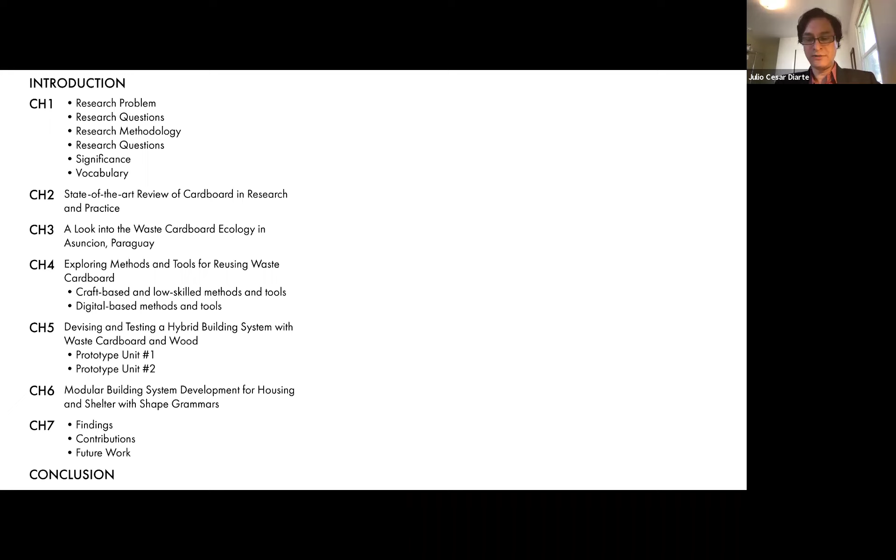This is the dissertation's structure, and this presentation's goal is to walk you through each one of the chapters and share with you the findings and contributions.

Let's start with the research problem. This dissertation explores how to take advantage of the rapid growth of urban solid waste and the potential of waste cardboard as a resource to support low-cost housing solutions in low and middle income countries. Waste cardboard is among the least valued recyclable products, and it is highly underused in these countries. The work aims to contribute solutions to tackle the lack of decent housing in these countries where recycling and reusing rates are still low.

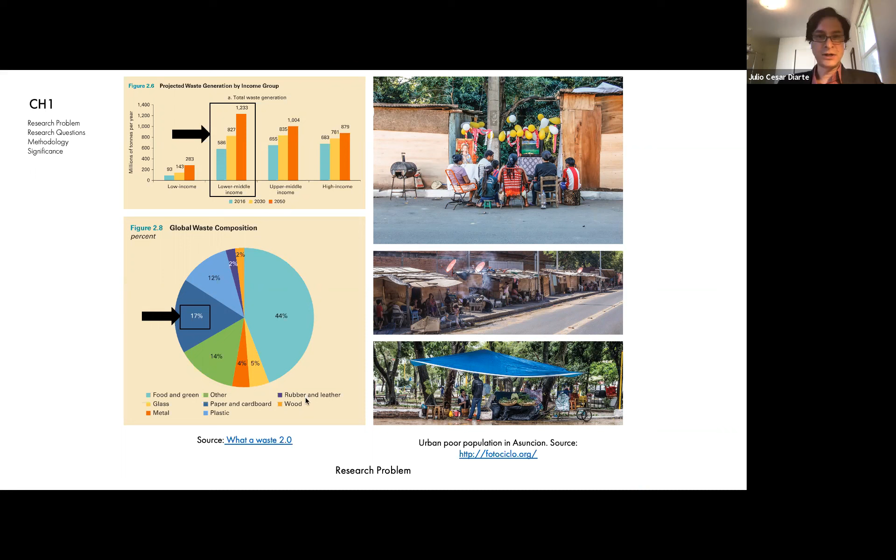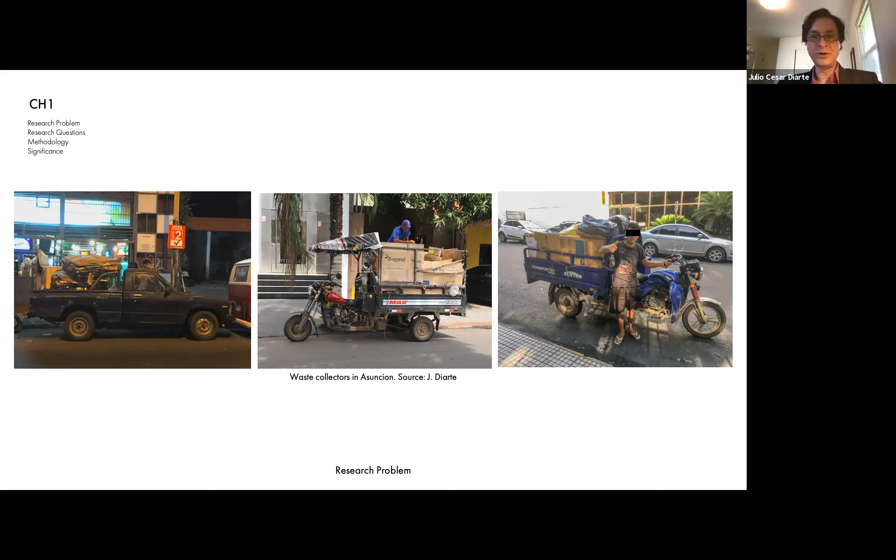In this dissertation, I will show that waste corrugated cardboard has the potential as a building material to produce low-cost building parts for housing. I will also show that the system could help self-employed waste collectors upcycle and potentially increment their revenue. Waste collectors have free access to this material but do not have the means to upcycle it.

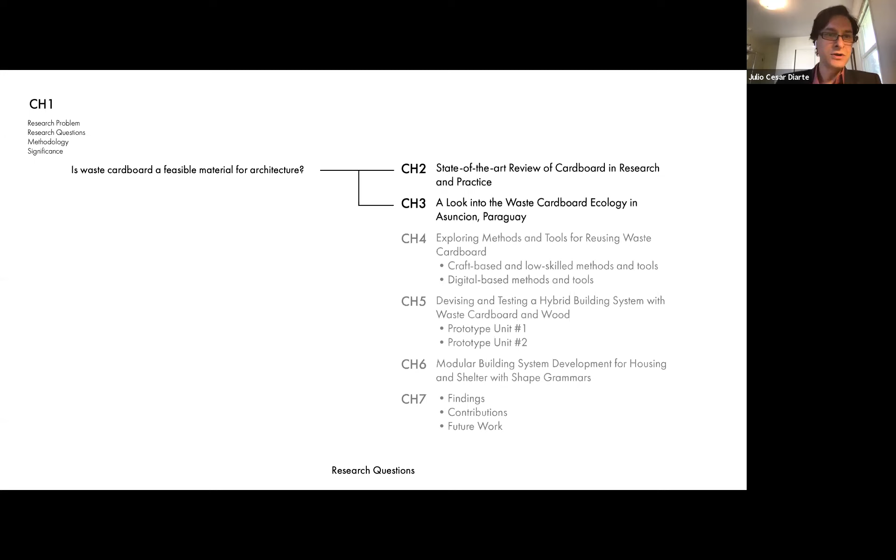Let's start with chapter one. First, I want to mention the research questions that guide this dissertation. Is waste cardboard a feasible material for architecture? This is addressed in chapters 2 and 3. How to make low-cost building components for housing construction with waste cardboard is addressed in chapters 3 and 4.

How to enhance cardboard material properties and decrease its vulnerabilities, and what methods, tools, and technologies are needed to produce the building components with this material, and how to introduce this to waste collector communities is addressed in chapters 4 and 5. Finally, how to formalize the proposed methods to create a building system with waste cardboard as a main component is addressed in chapters 5 and 6.

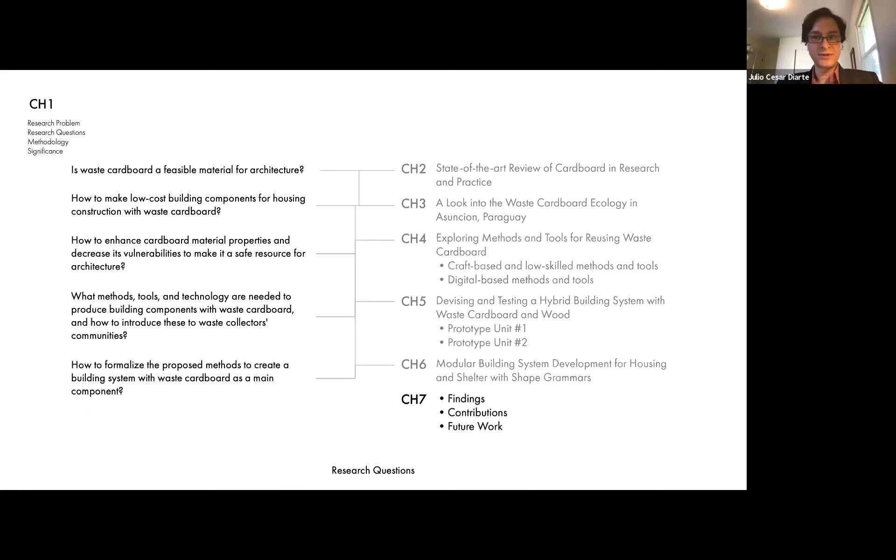Chapter 7 will revisit all these questions and discuss findings, contributions, and future work.

The dissertation used different research methods for each chapter. Chapter 2 was exploratory work developing reviews and preliminary material explorations. Chapter 3 used design ethnography and case study to implement field observations and key informant interviews. Chapters 4 and 5 are more experimental work, prototyping and developing building components, even at full scale. Chapter 6 is exploratory work where I design a building system for housing using the work I did before, in this case using shape grammars.

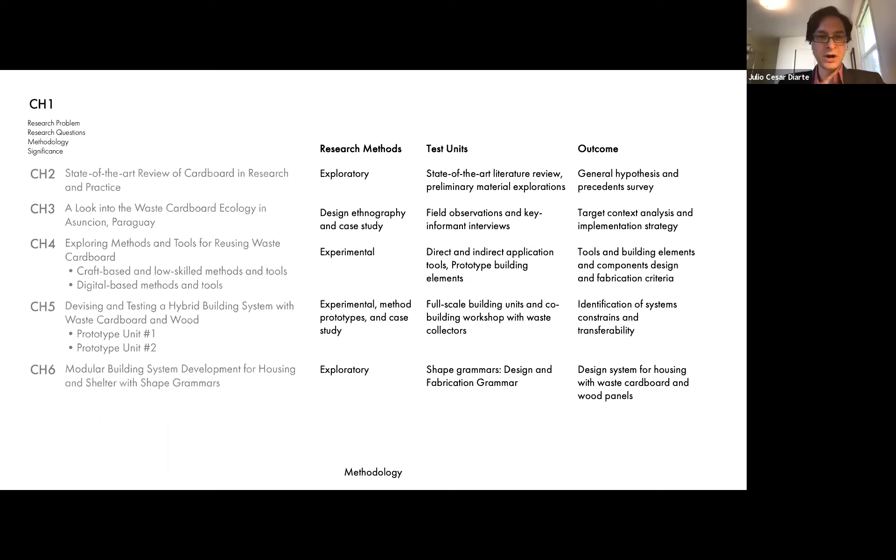The significance of the research touches 4 different points. The first is diverting waste cardboard from the urban waste stream to a resource for construction. This has environmental significance, especially in low and middle income countries where most waste cardboard ends up in landfills or open dumps, and where people need alternative solutions for housing. Second, it introduces waste cardboard as a resource for architecture.

This is important because most of the cardboard used today in architecture is brand new cardboard, and there is very little research done regarding direct reuse of material collected from the streets.

The dissertation supports the work of waste collectors in low and middle income countries because, as I mentioned before, they need housing and have almost free access to the material, but do not have the means to reuse it. The dissertation provides them with tools to bridge this gap.

The dissertation also bridges university and community. Here, the university serves as a resource to support collectors' work and organize co-building workshops to train them to use the system proposed here.

Let's move now to chapter number 2, which is the review about cardboard in research and practice. This graphic shows the chronology of cardboard in research and practice during the last 8 decades.

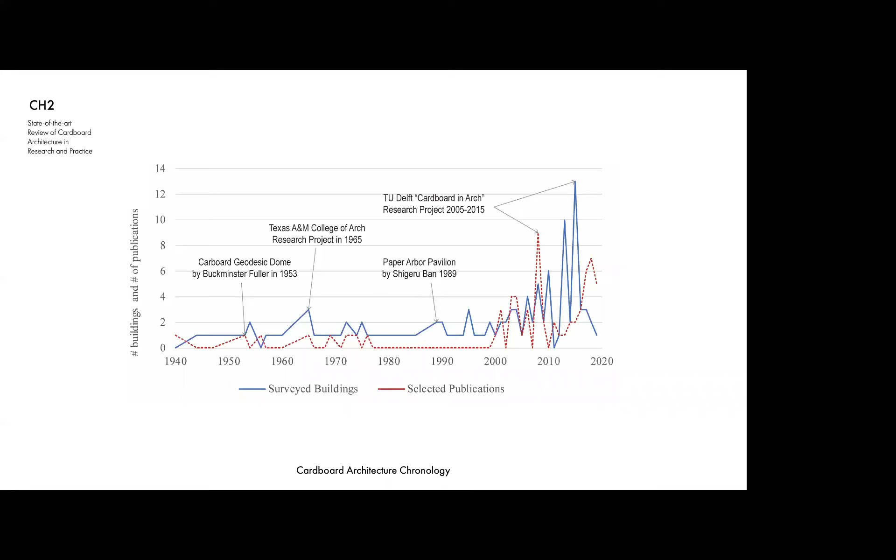The emergence of Shigeru Ban's buildings in the 1990s motivated the establishment of research centers in different universities. The main goal of these centers was to find new applications of brand new paper cardboard in architecture and structural engineering. The sustainability factor of paper products is still one of the main drivers of interest in this material.

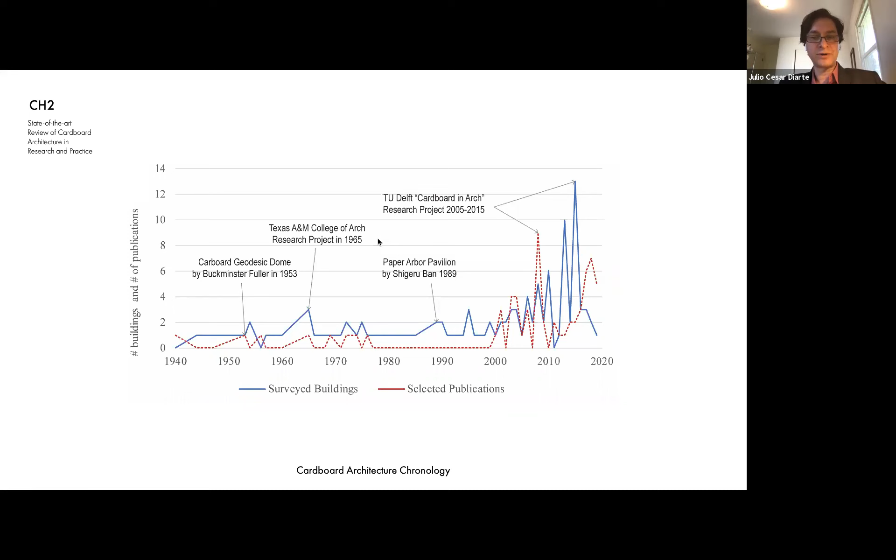Cardboard architecture chronology has two phases. The first was from 1940 to 1976, where the interest focused on structural performance, durability, thermal and moisture resistance of different composite walls.

However, concerns over durability of cardboard structures under long-term loads and natural elements led to the adoption of other materials such as aluminum, plywood, and plastics combined with foam.

The same advantages and concerns were maintained in the second phase from 2000 onwards, but interest in the sustainability of paper prevailed, and closer collaboration between designers and engineers opened the path to significant advancements.

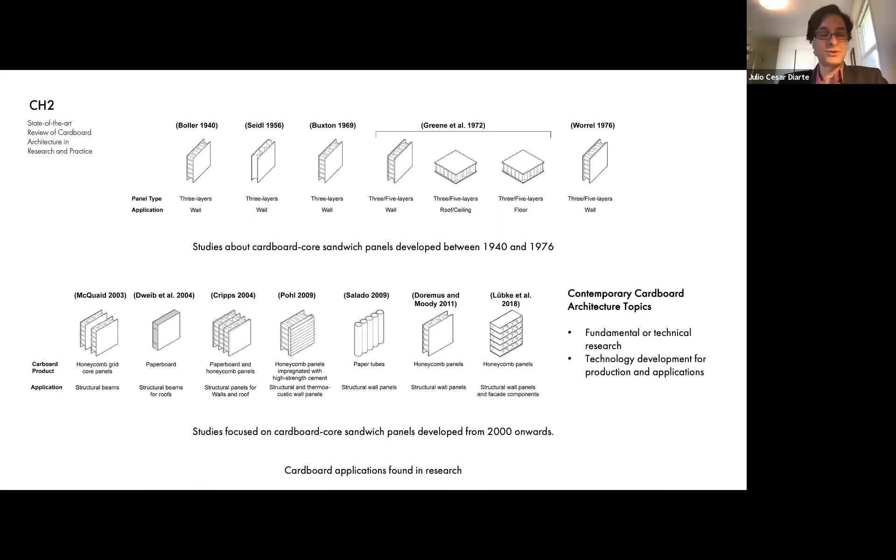Contemporary cardboard architecture topics center on fundamental or technical research, trying to improve the material properties of cardboard against moisture, and technology development for production of building components and their applications in architecture, always regarding brand new cardboard.

The review allowed me to identify two types of structural systems in cardboard architecture: active vector and active surface structures. Most of Shigeru Ban's works fall into the category of vector structures, using paper tubes as the main material. However, flat surface structures made with corrugated cardboard or honeycomb boards are much more common.

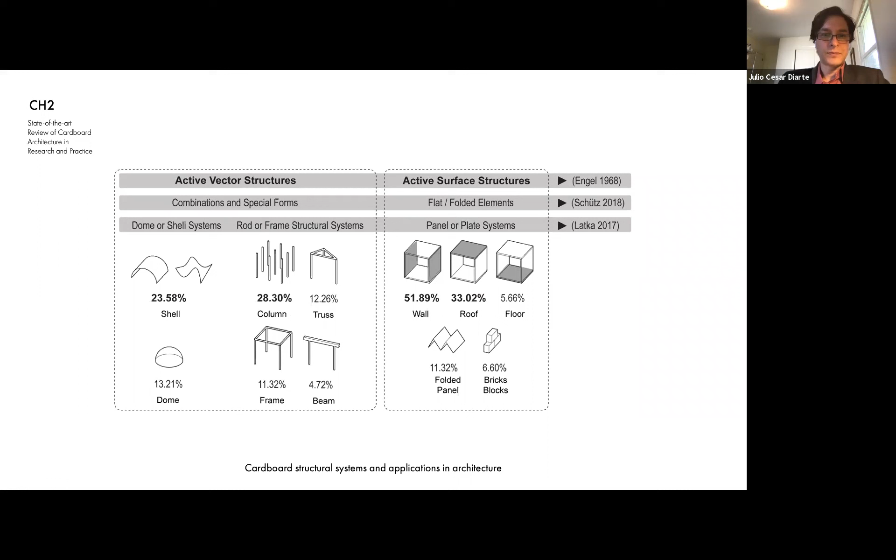These are some of the main strategies applied to both increase load-bearing strength and decrease moisture absorption. I highlighted those that I believe are applicable in low-cost contexts, which include joints, application of joint systems, reinforcement, and stiffeners made of wood or steel, depending on the budget.

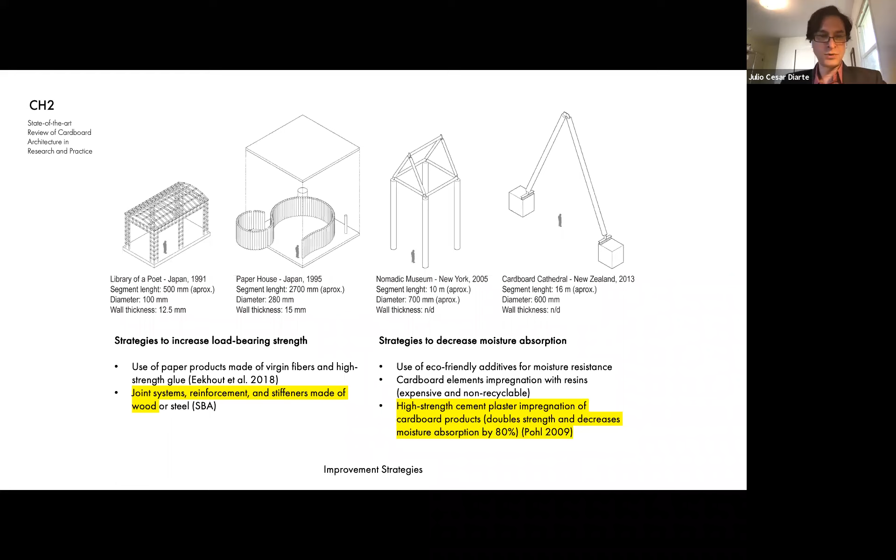To decrease moisture absorption, the most effective method is the application of high strength cement plaster to cardboard products. This is proven to double the strength and decrease moisture absorption by 80%, according to research groups at ETH and other universities in Europe and North America.

To close this chapter, I want to mention that we submitted a paper about cardboard architecture, eight decades of exploration in academic research and professional practice, to the Journal of Architecture, and this is currently under review.

Moving now to chapter 3, here I will talk about the field study that I did in Asunción, Paraguay. I developed an exploratory study to understand the waste cardboard collection process in a real context situation. In this work, I pay attention to the work of waste collectors, who are the potential implementers of the cardboard building system. I chose Asunción as an example of a growing urban area with very low recycling rates.

This is compared to other countries in the region and worldwide, and because there is an increasing number of waste collectors in the area. Also, most of the recyclable materials that are collected are exported and are not really being taken advantage of in the country.

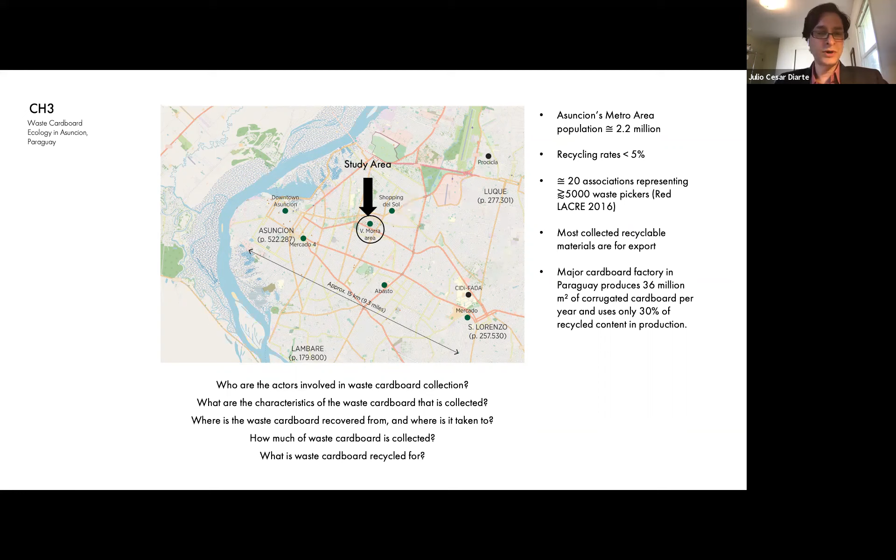I carried out field observations in the commercial area of Villa Morra here in the center, and interviewed different people involved in the cycle of waste cardboard in the metro area. These are some of the questions that guided my work in Asunción in December 2018, and August and December 2019.

Even though people collecting urban waste are commonly portrayed as the poorest of the poor and their work as marginal, the truth is these communities play a significant role in the industry's supply chain of raw materials. Since 2000, waste pickers in Latin America transitioned from scavengers to self-employed environmental entrepreneurs and have achieved a remarkable level of organization through cooperatives and associations.

Waste collectors in Asunción aren't recognized as formal workers yet. They come from poor areas of the city, equipped with three-wheelers or on foot pulling a cart. They recover aluminum, glass, paper, and cardboard. Waste cardboard, they say, must be dry and uncontaminated with food.

Otherwise, they cannot sell it to the final recyclers. They are conscious of the value of what they do and the material they recover, but do not have the means, financial or technical, to learn how to upcycle materials to increase revenue or use them as a resource for building or improving their houses.

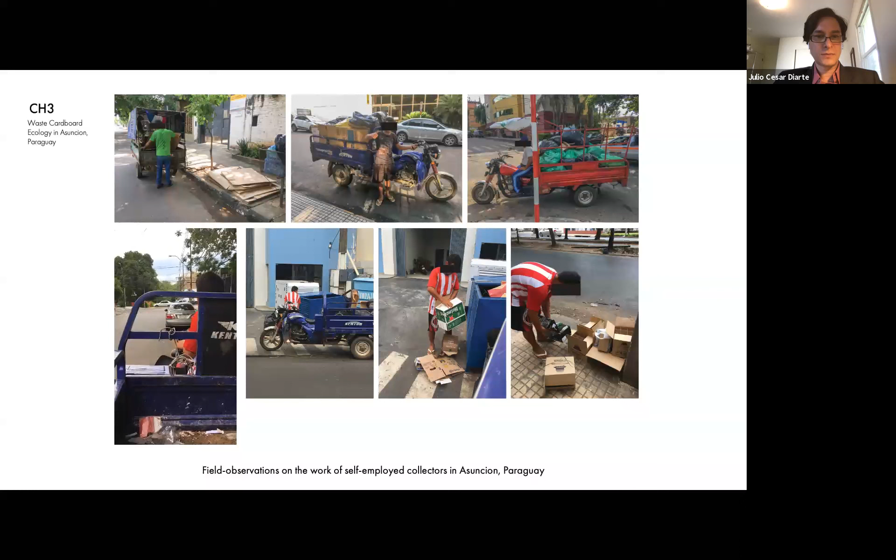Other actors playing a relevant role in the cycle of waste cardboard are NGOs and startups, and local paper industries. NGOs and startups focus on collection, sale, and waste management training for private companies. Both make a gigantic effort to help informal waste collectors improve their working conditions. However, none of them have the capacity to upcycle what they collect. Regarding paper factories, it is unclear how much waste cardboard they recycle.

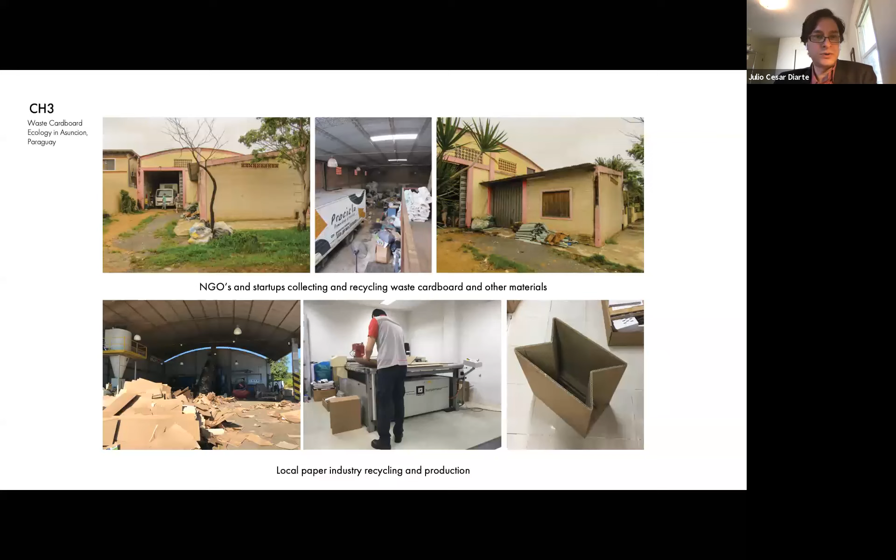The largest paper company in Paraguay, for example, uses only 30% recycled cardboard in the total production of brand new cardboard. According to them, waste cardboard can be recycled up to five times and it only serves to make more cardboard, making it the least valued product. Paper factories, on the other hand, are equipped with high-tech tools that could easily transform brand new cardboard products into construction components.

The intervention strategy seeks to take advantage of the low price of waste cardboard, its high degree of availability, and the low production level of brand new cardboard that uses recycled material. In this scenario, cardboard factories, NGOs, startups, and waste collectors can contribute to create a new value chain for the material. The research proposes to equip waste collectors in recycling and reusing centers with technology developed at the university to produce building components for housing.

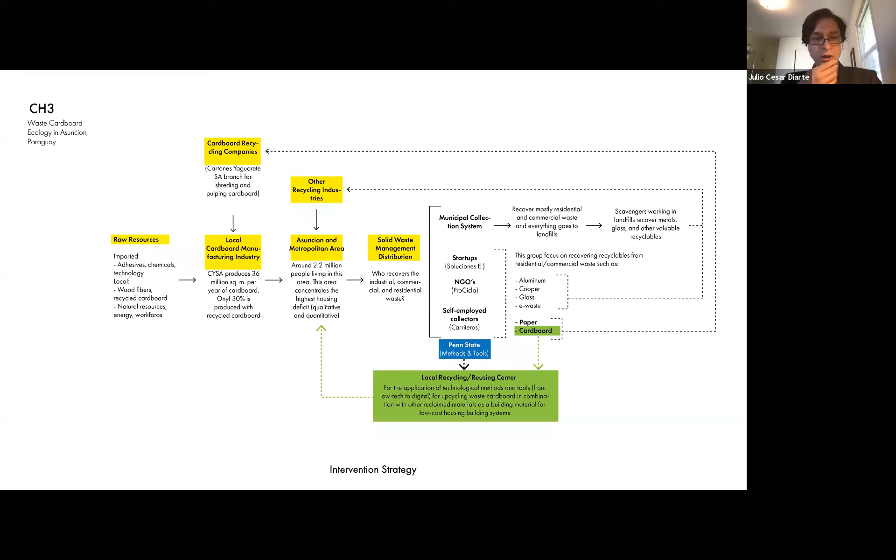Within this framework, the research proposes a case study described in chapter 5. In this study, I worked with several stakeholders, including waste collectors, NGOs, a startup, and the university, for organizing a co-building workshop.

Moving now to chapter 4, which is about methods and tools. Chapter 4 is divided into two parts. The first part presents craft-based and low-skill methods and tools intended for direct use by waste collectors. The other part is about digital-based methods and tools to design and generate fabrication instructions for building components.

The idea behind this is to find simple and safe ways of reusing waste cardboard and figure out what methods can help design and fabricate these components. The research focuses on prototypes and making as the main drivers of the investigation process.

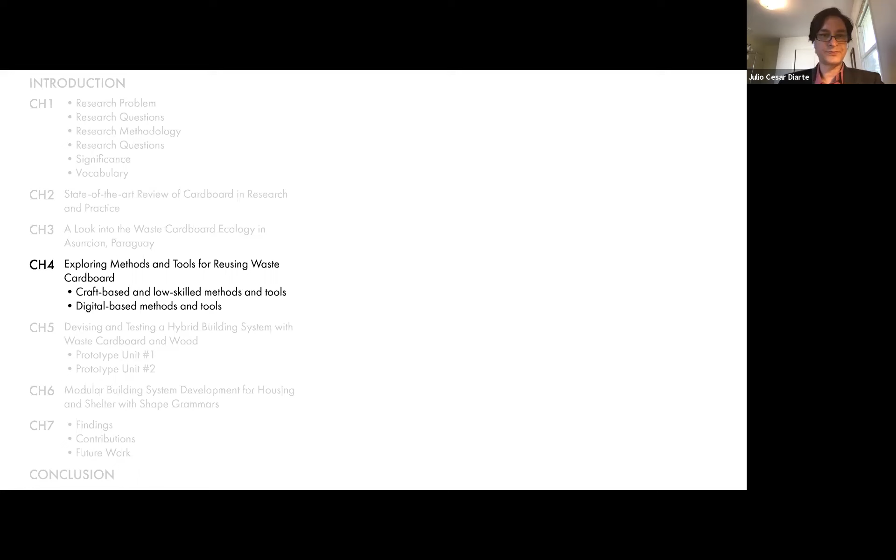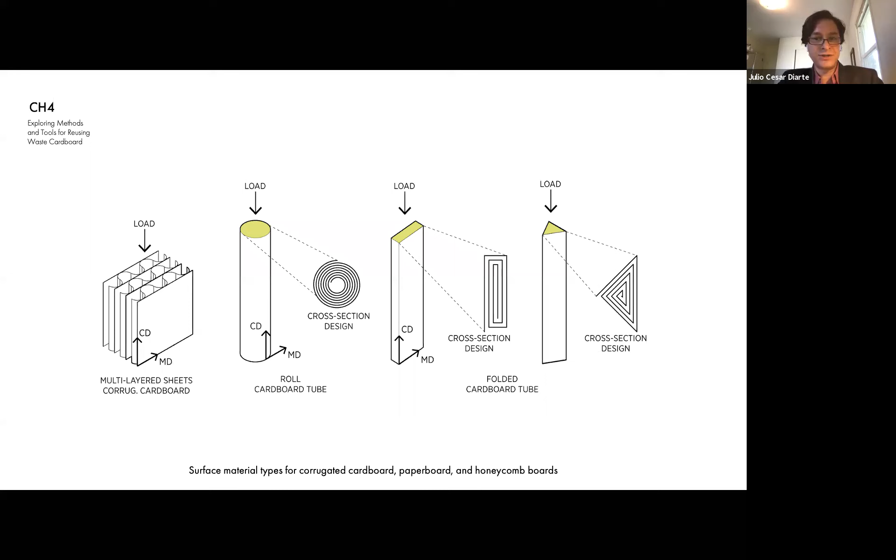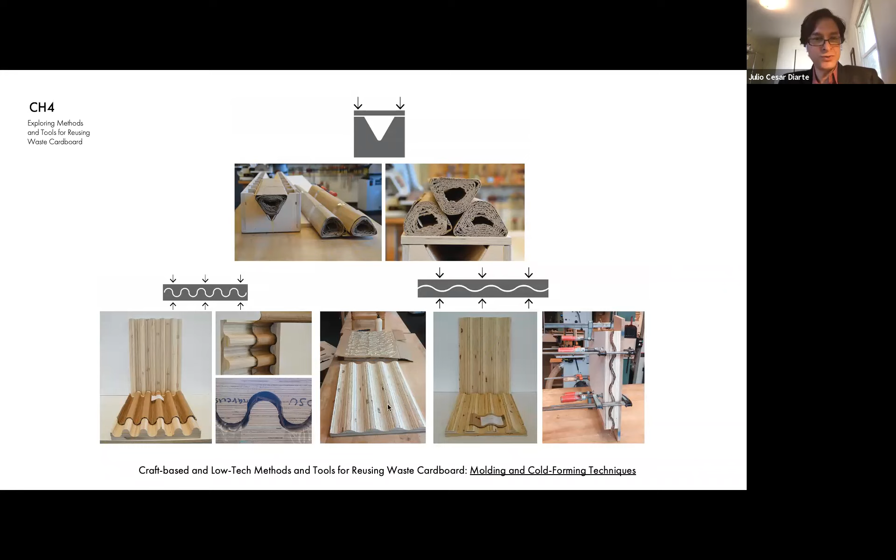These are some examples of making techniques using molds made of wood to form logs and boards. The idea was to develop tools that are easy to make, easy to use, and easy to maintain in the target context.

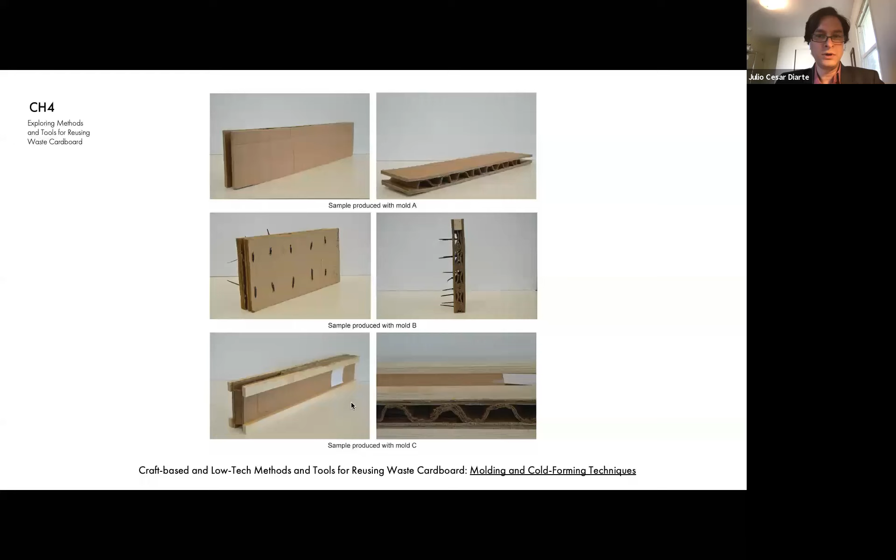These are some of the prototype building parts made with those tools, which can be used to make panels, or formwork for casting concrete panels or concrete beams.

Also, in the realm of craft-based and low-tech methods and tools, there is the parallel winding technique, a tool inspired by the fabrication process of standard paper tubes used for decades in the packaging and construction industries. The process facilitates making logs or posts of variable diameter and length that could resist a load by itself or in combination with other materials.

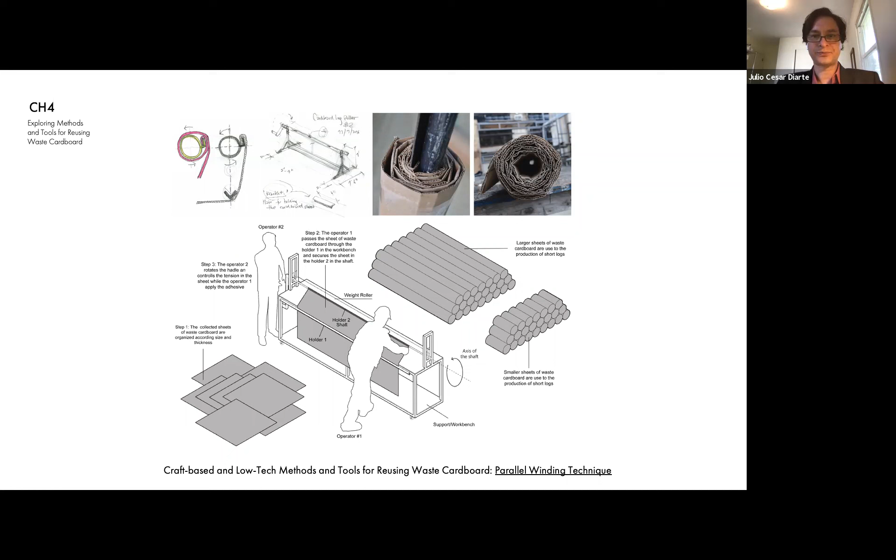The slide shows the testing process of the tool. This was completely developed at the Stuckeman shop.

Some of the benefits of these tools include that they are easy to make in the target context. They are user friendly, low maintenance. They are very good for producing a small size of cardboard sheets. They can be automated easily, and they are light and transportable.

On the other hand, they need to be fabricated by professionals. They are relatively low cost depending on the materials used. It is not that good yet for making large building parts and requires lots of physical effort. And still, the quality of the outcome is very rough and needs further development.

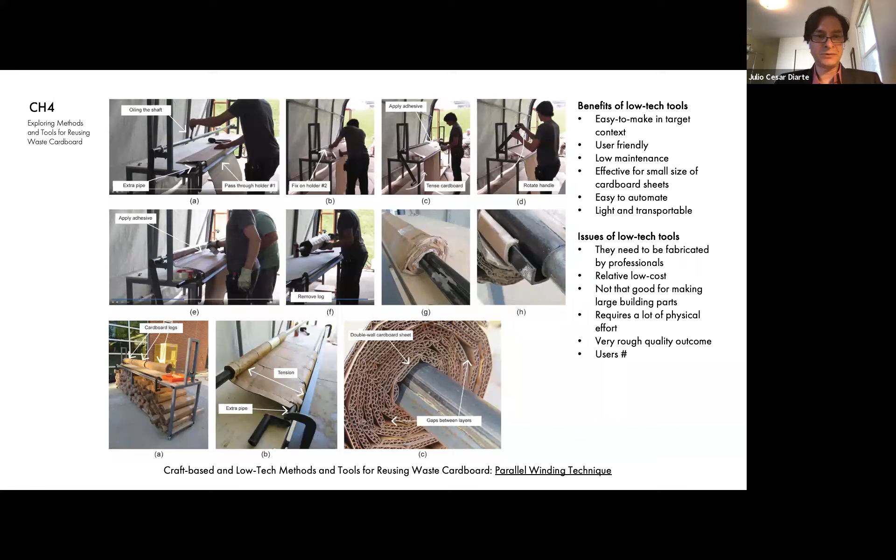Unlike low-tech tools, these digital-based tools are not intended for direct use by waste collectors yet. Instead, these tools provide instructions for waste collectors to make the building components.

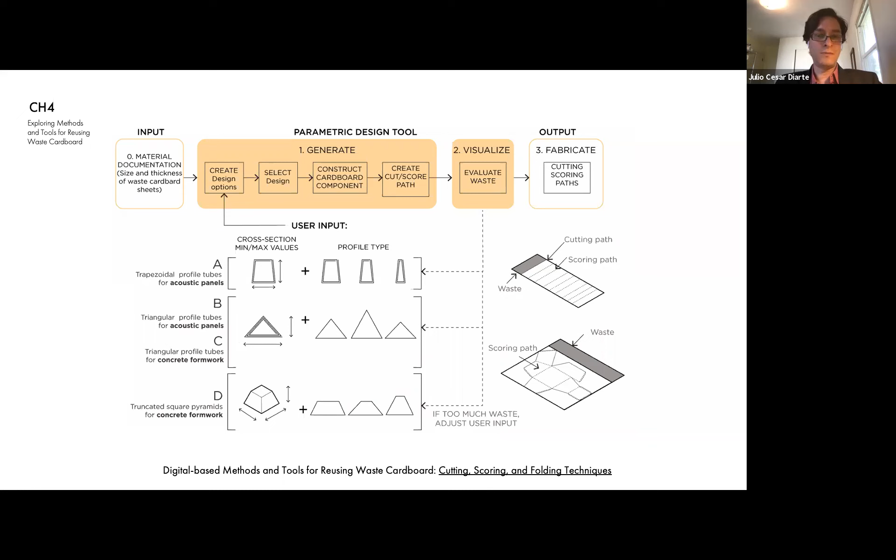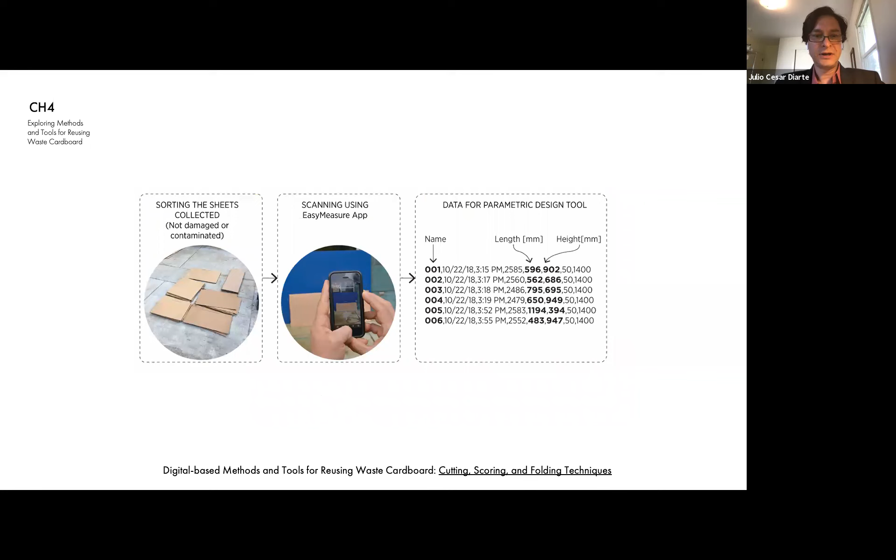The workflow starts with recording the size and thickness of the sheets using existing smartphone applications widely available in the target context. Then the digital tool receives the material documentation data—size, thickness—and compares it with the user's design. On the top left, we can see the different options configured by the designer.

These are the selected options that match the existing material. Finally, the tool provides printed instructions for cutting, scoring, and folding sheets of waste cardboard, everything done by hand. Some of the benefits of these digital tools include...

increased material reuse, adapting any kind of sheet to almost any kind of building component shape, providing fabrication instructions for manual production, and being adaptable to other types of flat and foldable materials.

The main issue with this tool is that it requires high skills for implementation. Therefore, it is not intended for direct use by waste collectors yet.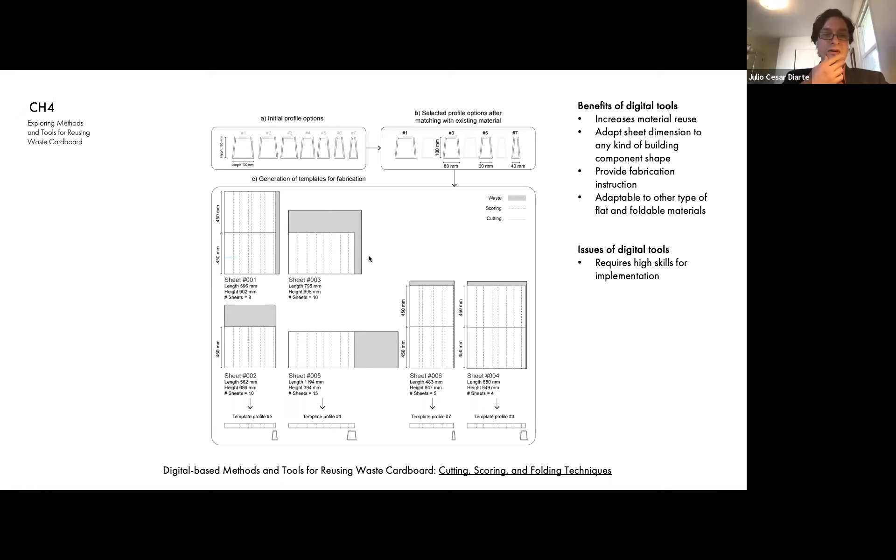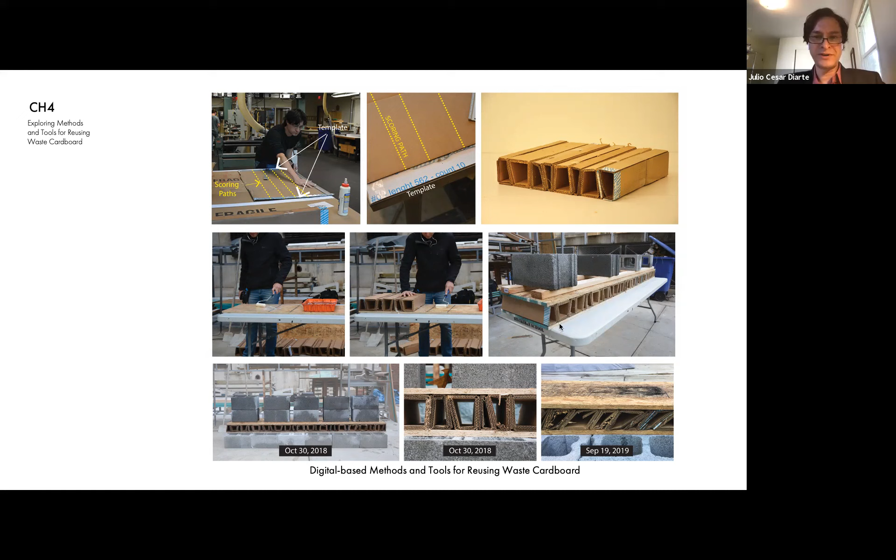The printed instructions are used to fabricate and assemble building components. This is an example of a floor panel made with OSB boards and folded tubes of waste cardboard sheets as a structural reinforcement.

I also tested the application of the digital tool to design and fabricate acoustic panels made with triangular profile tubes, and performed some preliminary acoustic insulation tests at Penn State and in Asunción, comparing the prototype acoustic panel with conventional and expensive rockwool insulation material. It turned out that waste cardboard panels have decent acoustic insulation properties compared to rockwool.

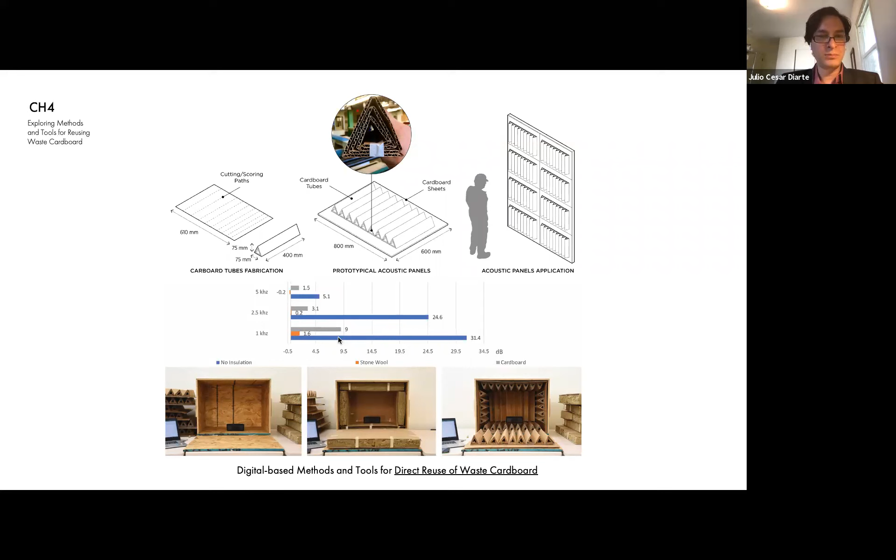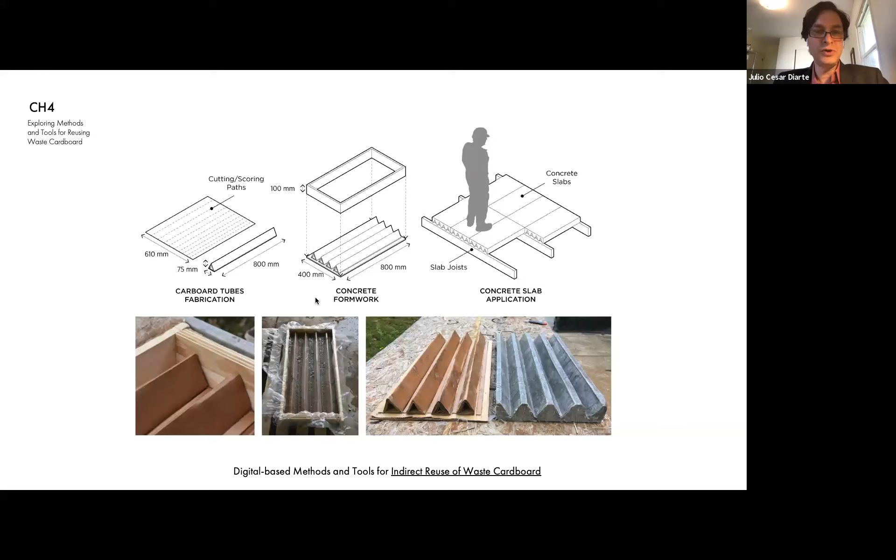Furthermore, I used the same triangular profile tubes made with the digital tool to explore making concrete formwork. The examples here show a modular concrete slab for a potential flooring system. This is an indirect way of using waste cardboard, supporting existing building techniques.

I also tested the digital tool to design and make molds.

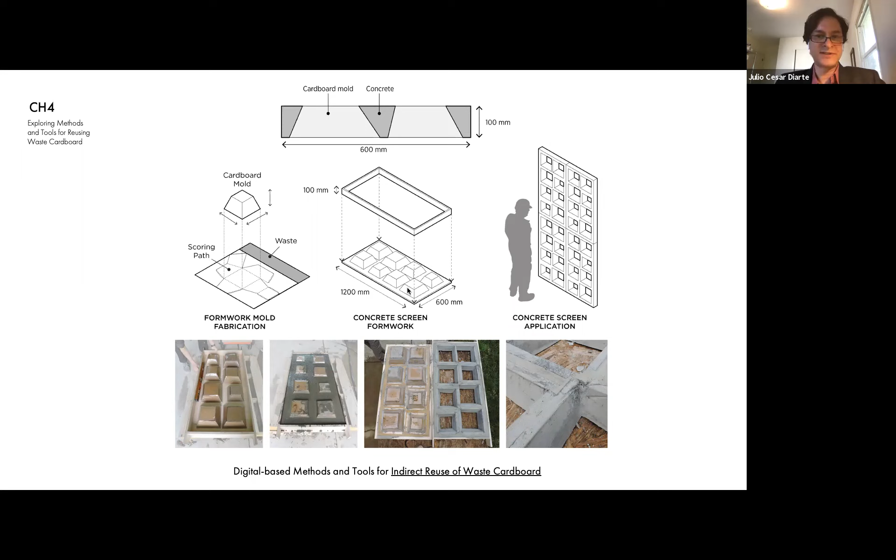These molds result very convenient to cast a screen wall made of reinforced concrete that could be used to protect a facade from direct sunlight or other elements.

Some lessons learned in this process of making tools and prototyping building components include that molding and cold forming techniques are low cost, but require lots of handwork and improvement to improve the quality of the outcome. Winding tools aren't expensive and can produce cardboard logs for panel infill, but the mechanism still needs improvements for quality.

Digital tools facilitate dealing with waste cardboard sheets of variable size and thickness, and can adapt to almost any shape. However, they require high skills to use. The templates generated by digital tools are uncomplicated to follow, but need better step-by-step instructions for lay people to understand. I'm going to show an example of this in the next chapter.

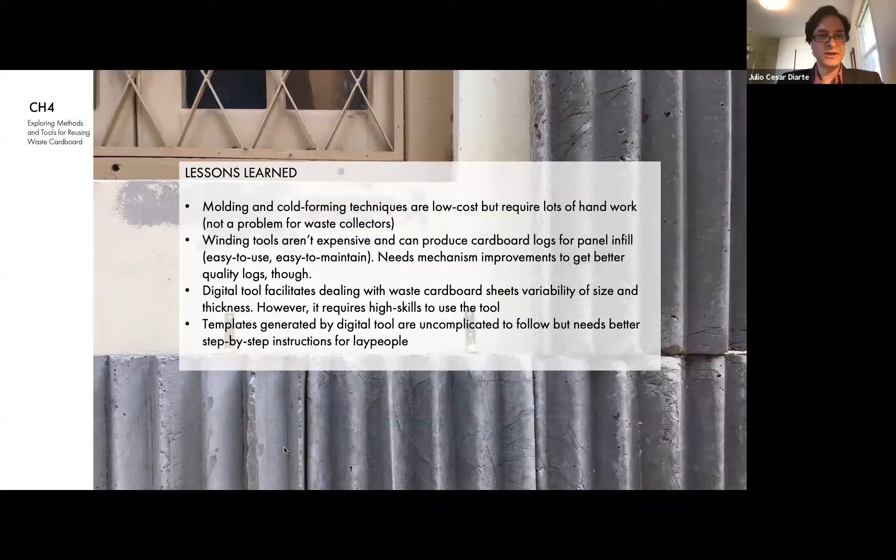Moving now to chapter 5. So far, I've shown how to make building elements with waste cardboard sheets. In this chapter, I will present two examples of full-scale prototype building units using all the elements shown in chapter 4.

Some of the design principles used to create these prototype units are off-site prefabrication of building parts using a combination of waste cardboard and wood, which I'll explain later. Also modular construction and incremental construction, principles appropriate for a context where things are built by parts according to available resources.

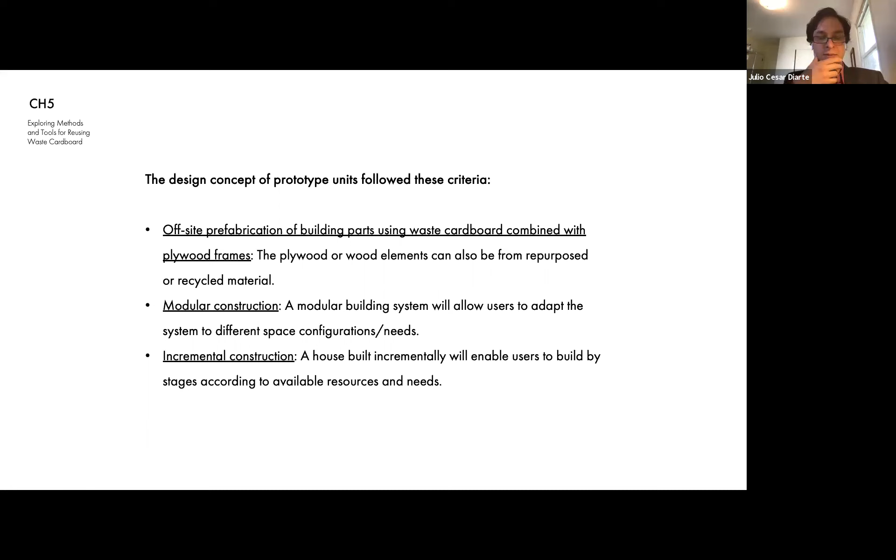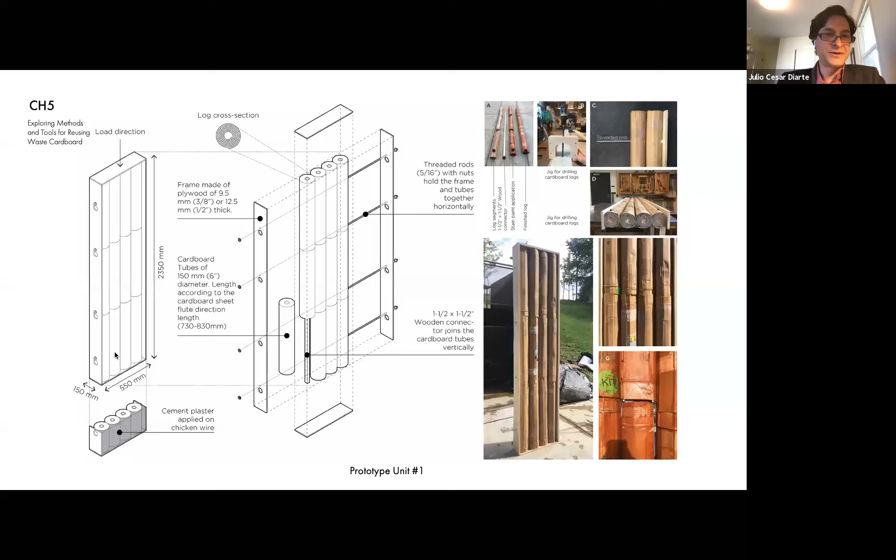Prototype unit number 1 was made with panels composed of a plywood frame and cardboard logs fabricated with the parallel winding tool. The plywood frame helps contain the logs, receive fasteners, and connect panels to each other.

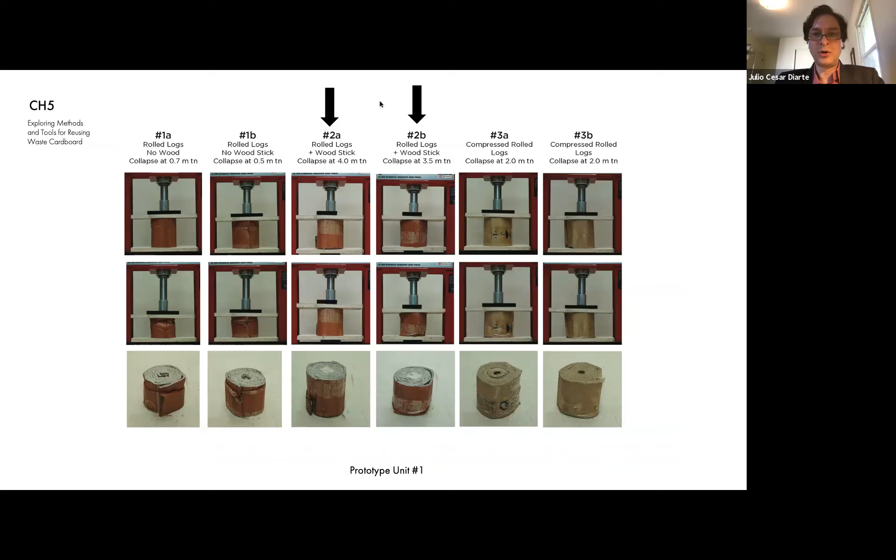I performed a series of load-bearing strength tests on different configurations of cardboard logs. The slide shows cardboard logs with and without wood inserts. Wood inserts, in this case, increase the component's resistance.

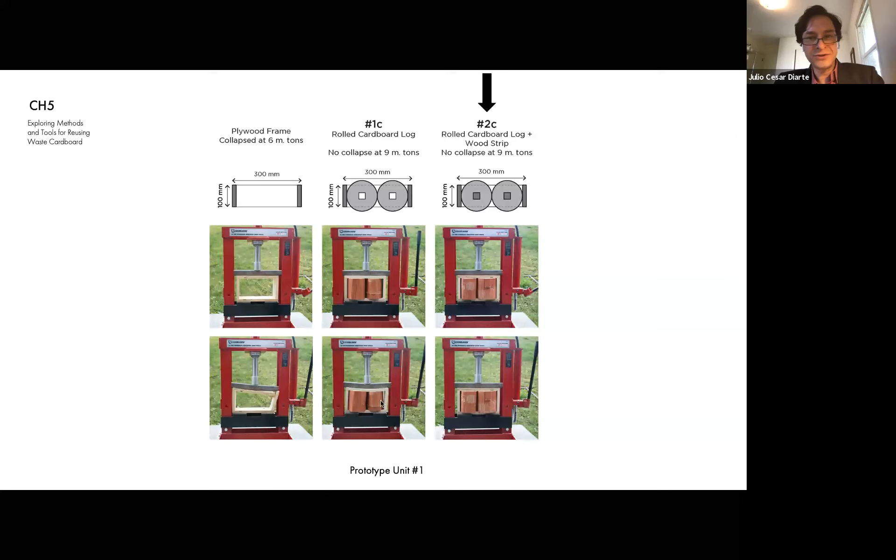Next, I performed more tests on samples that include wood inserts and plywood frame to understand the capacity of each configuration. The example on the right is the one that I finally applied in prototype unit number 1.

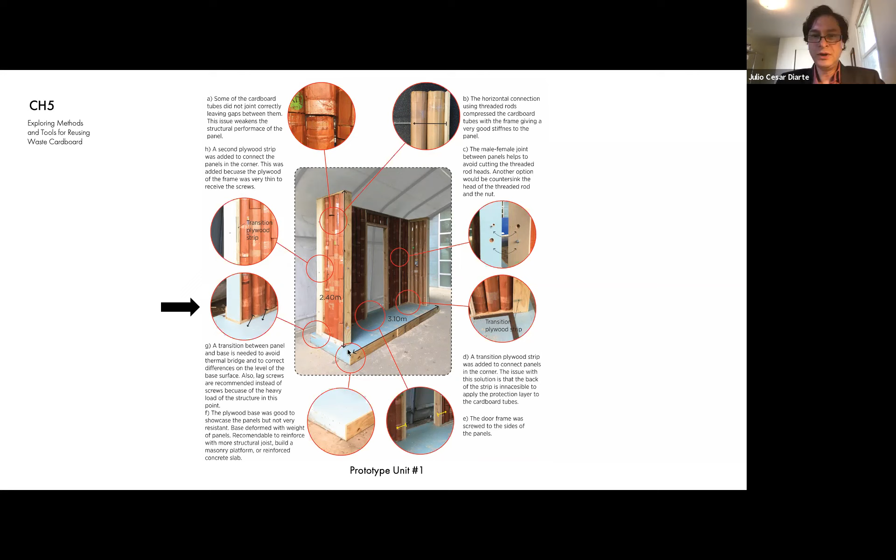The full scale... yes, sorry.

Let's move now to the second prototype unit. The goal of this prototype was to test the use of cardboard tubes instead of cardboard logs, and also layer sheets with a plywood frame to make a floor, ceiling, and wall panel system.

In addition, I wanted to test fabricating this with waste collectors in a real context situation. Therefore, I organized a workshop in Asunción, Paraguay for doing this.

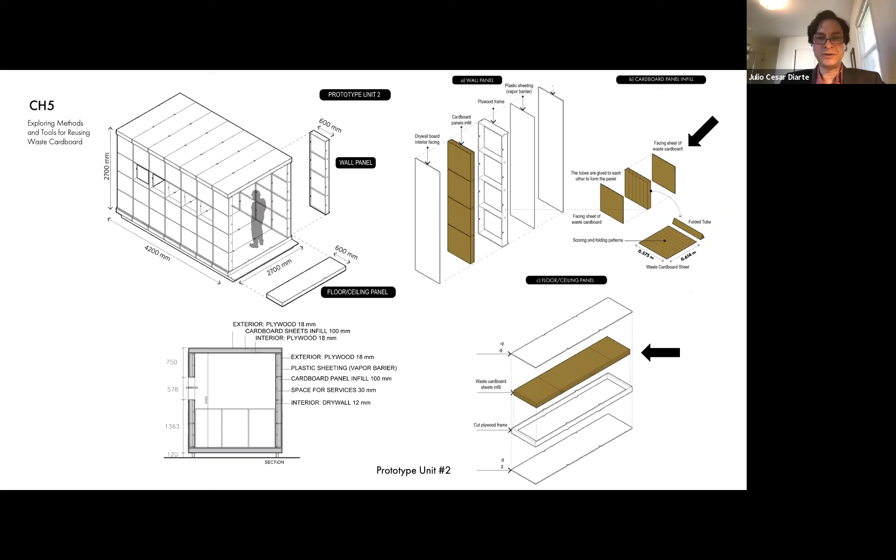Before going to Paraguay, I was able to perform some load-bearing strength tests to understand the component's capacity to vertical loads and use it as a structural element. I tested different samples with triangular profile tubes, and this is the sample that I used for the prototype.

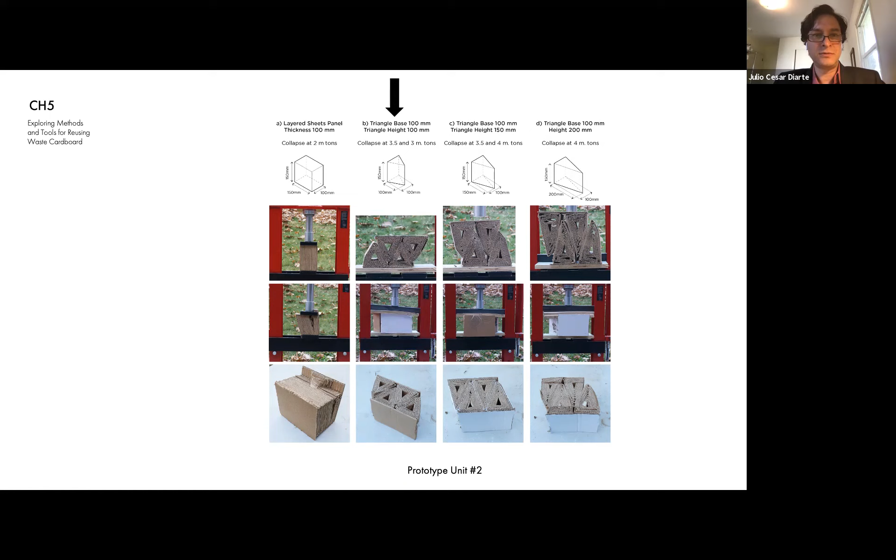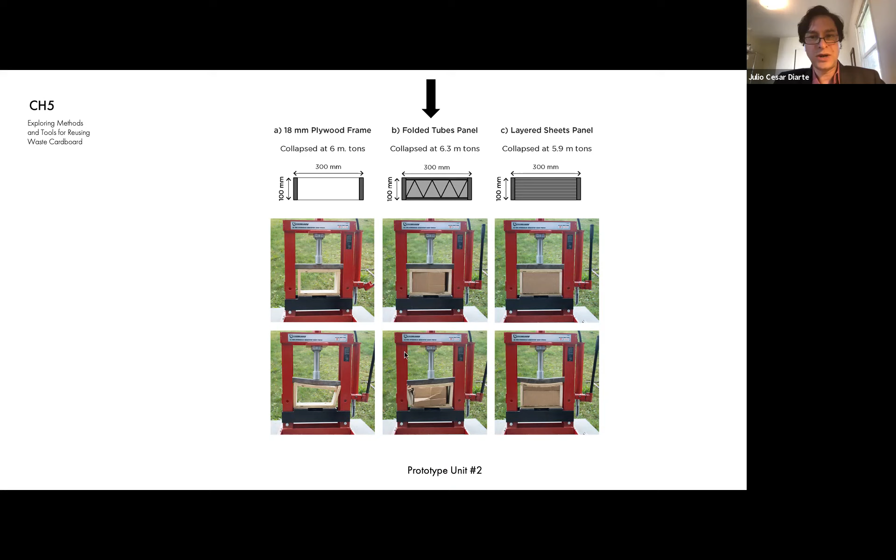I did additional tests, including the plywood frame, seeking to simulate the situation of the wall panel for prototype unit number 2.

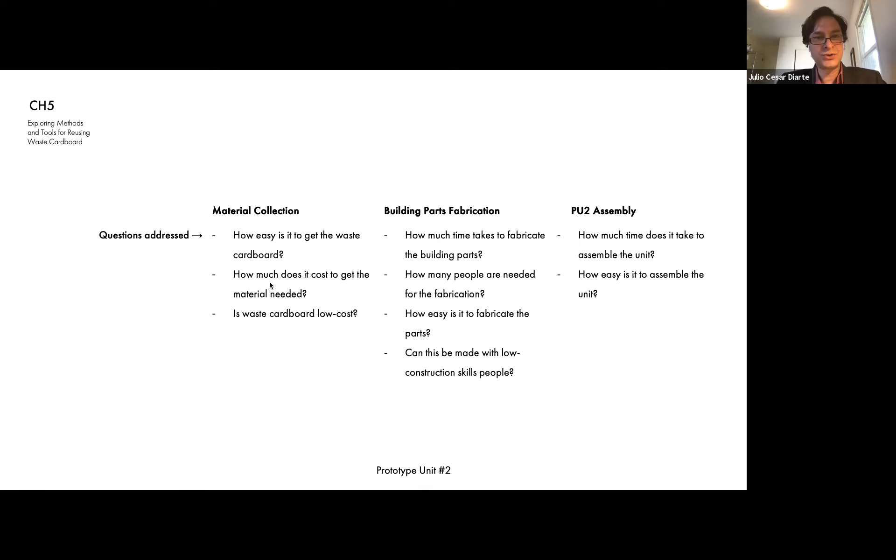Thinking about the workshop, these are some of the different questions I used as a guideline to organize the co-building workshop. Some questions are related to material collection, building parts fabrication, and building assembly.

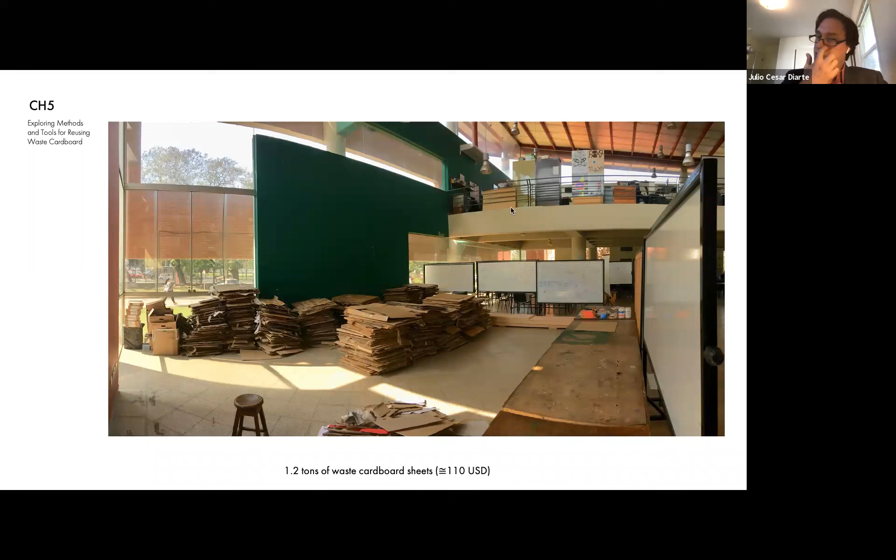The workshop used 1.2 tons of waste cardboard sheets provided by collectors and an NGO. This is the place where I did the workshop, held at the Center for Research, Innovation, and Development at the Architecture School in Paraguay in August 2019, lasting 5 days.

I worked with 4 waste collectors. Some of them had little experience in self-construction of their own houses. This is very common in Paraguay—people are used to participating in the construction of their houses, especially in low-income families. But none of them had ever used the cardboard they collect to build something.

Waste collectors were involved in the fabrication of cardboard panels, assembly of wall panels, and assembly of the unit. They did not participate in the fabrication of wood frames due to safety concerns.

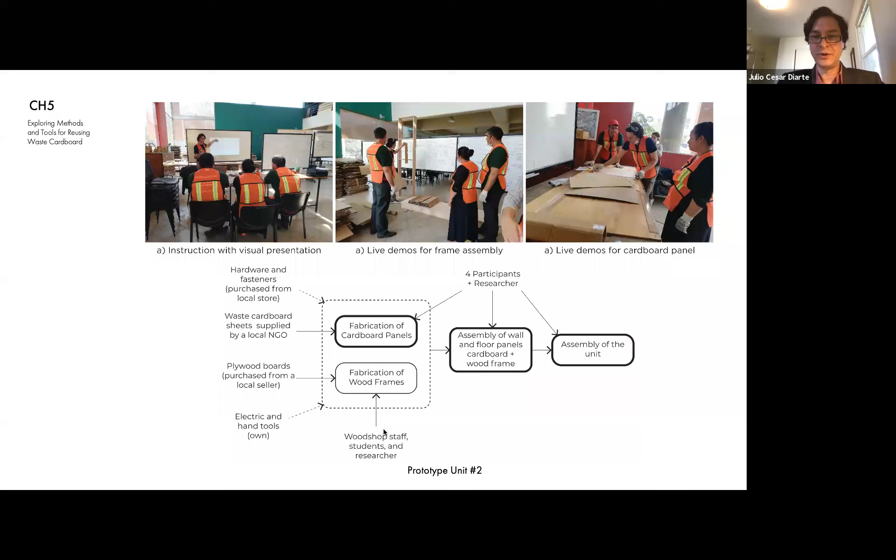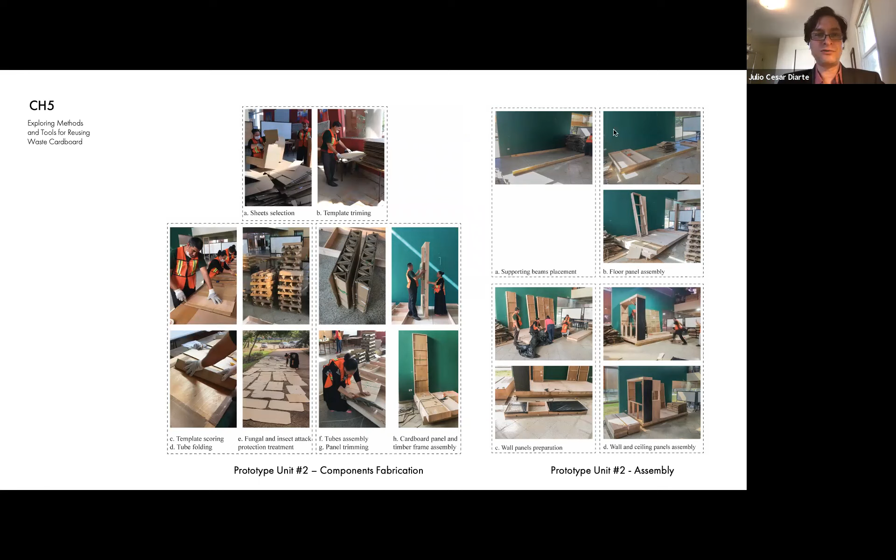Pictures of the process of applying fungal and insect attack protection, based on previous research developed by other research centers. And here on the right, images of the full assembly of the prototype unit.

A few lessons learned from these experiences include that cardboard occupied 8% of the materials budget in prototype unit number 2, 60% of the construction volume, and only 15% of the construction's weight, confirming the low cost and lightweight nature of the material.

On the other hand, plywood took 74% of the materials budget, which is very high. However, redesigning the plywood frames could reduce 30% of its cost.

The prototype unit cost is 25% more expensive compared to an equivalent construction made with traditional building materials in Paraguay. However, replacing wood with other materials and mass production could help reduce the system's cost.

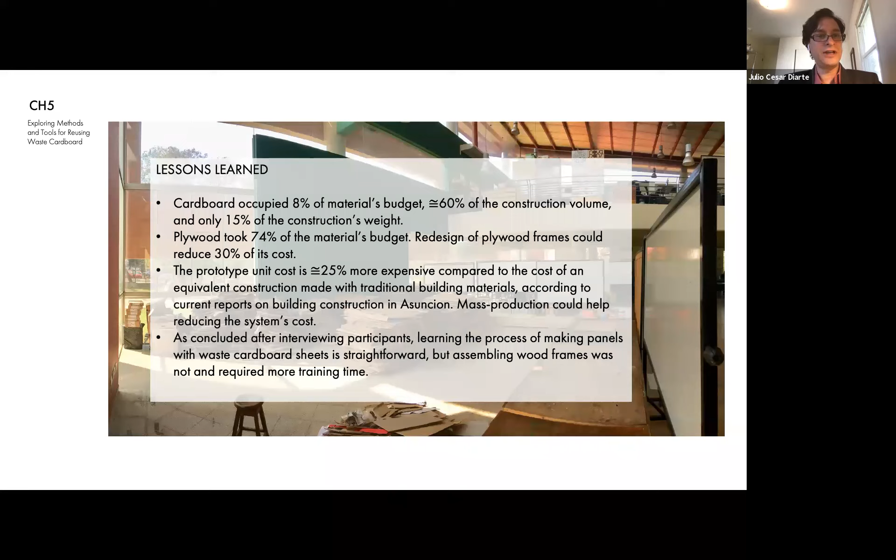In conclusion, after interviewing participants, learning the process of making panels with waste cardboard sheets was very straightforward for them. But assembling wood frames was not, and required much more training time.

Parts of chapter 4 and 5 were published as a book chapter of the CAAD Futures Conference 2019, and also in other proceedings of conferences at Georgia Tech, conferences on computational design such as eCAADe and SIGRADI, or conferences about materials, waste, or reuse of waste materials.

The goal of chapter 6 is to close the loop of the research by applying the previous results to devise a full modular housing system that could be used in the target context.

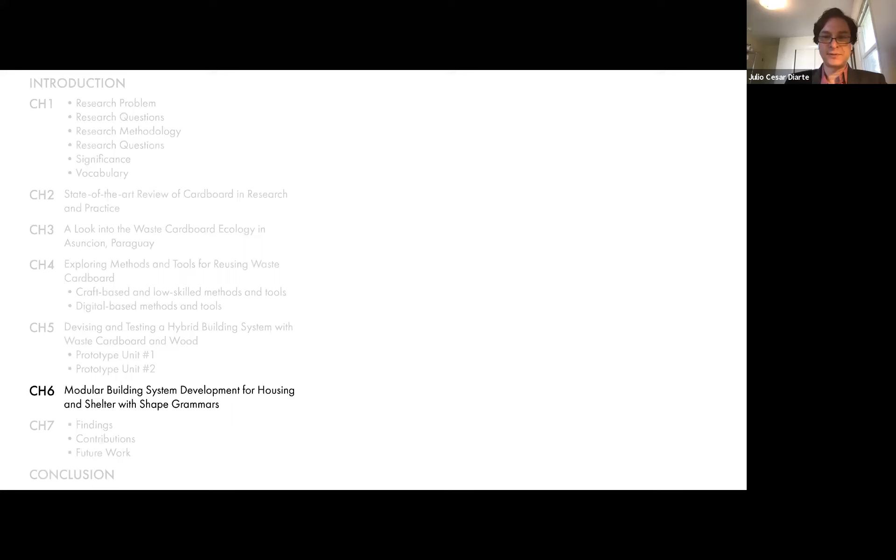This typology is quite common there and allows building by stages. This method is ideal for low-income households who build their houses according to available resources. The typology allows adapting the floor plan to plots of different dimensions and responds well to local climate. These are some reasons I use this as a case to experiment with the system.

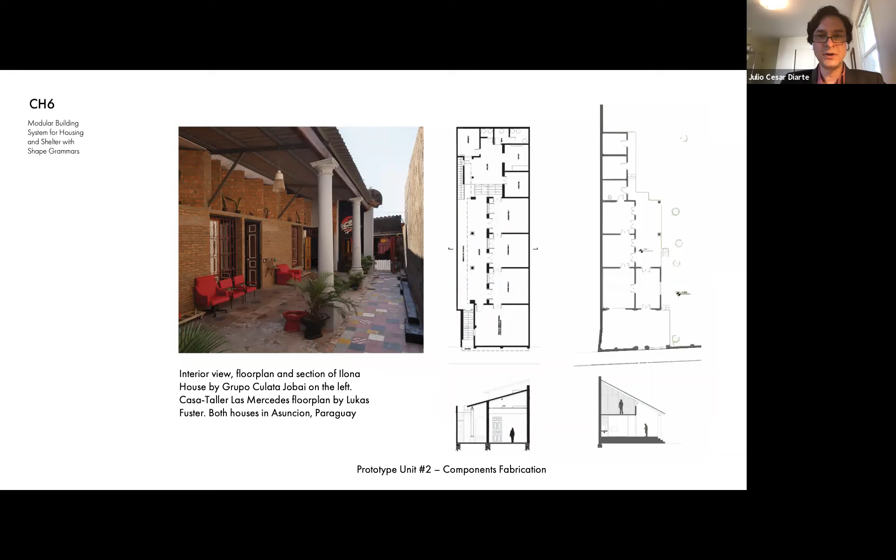Shape grammars is a rule-based algorithmic system used to create and understand designs by computing shapes and defining design languages. The grammar structure of the housing system has two parts.

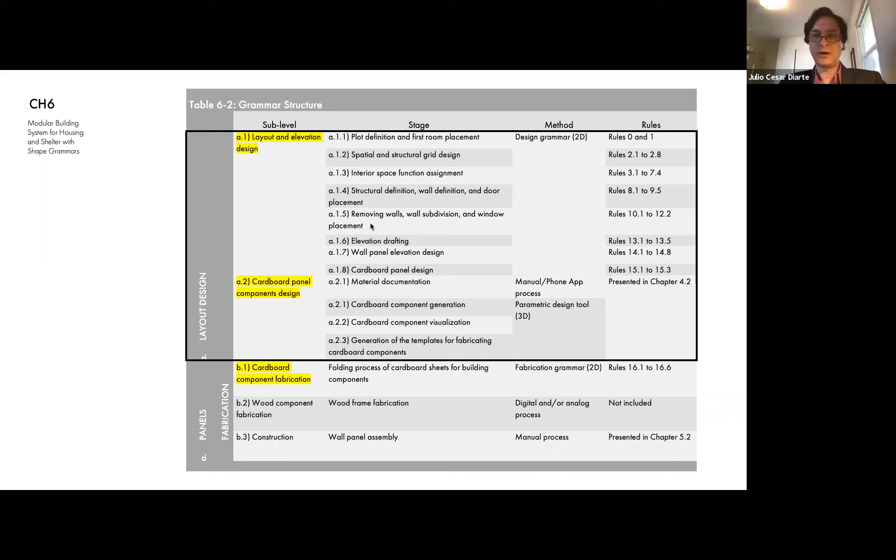The first part deals with the design of the layout of the house, and the second deals with the fabrication of the panels made of waste cardboard and wood frame. The shape grammar structure includes processes shown in chapters 4 and 5.

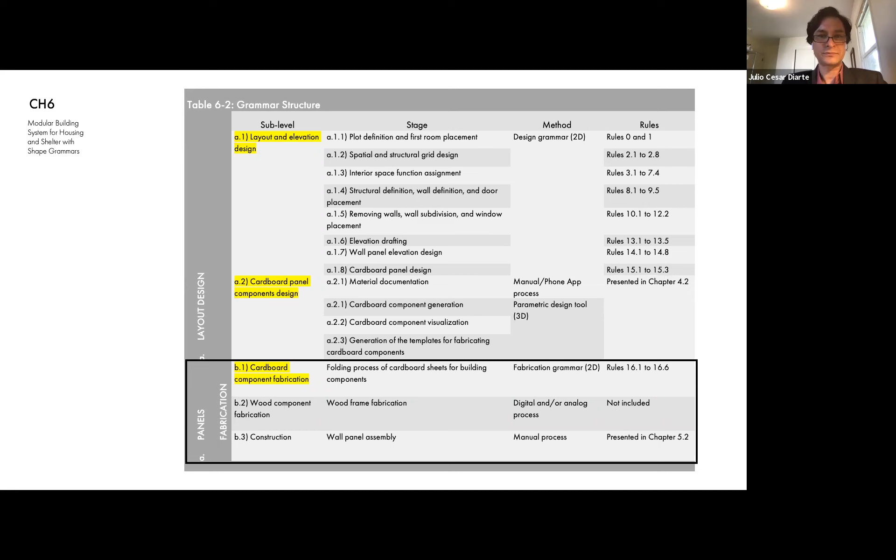This slide shows part of the rules created to design the layout of the house. It starts with defining the plot and placing the first room, and follows with the incremental addition of rooms until completing the programmatic needs of the house.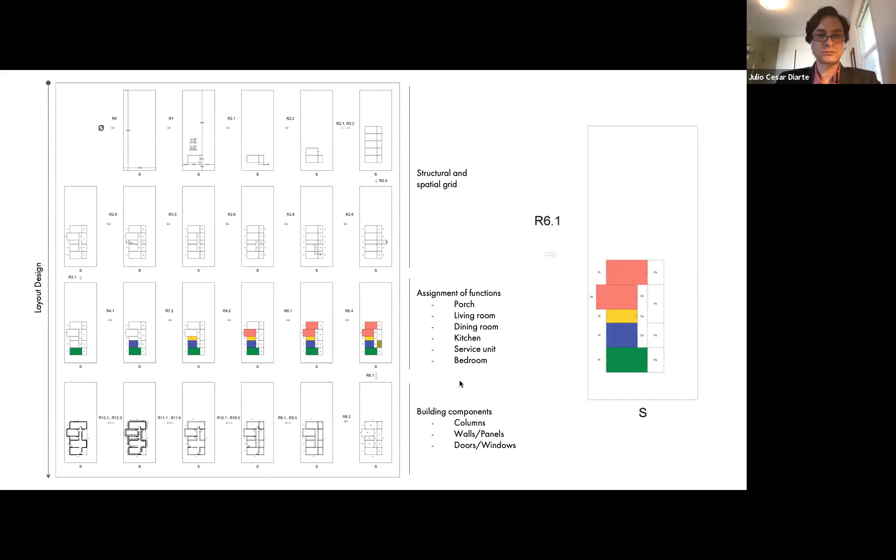After designing the layout of the house, the grammar facilitates generating the templates to fabricate wall panels, including waste cardboard components and wood frame.

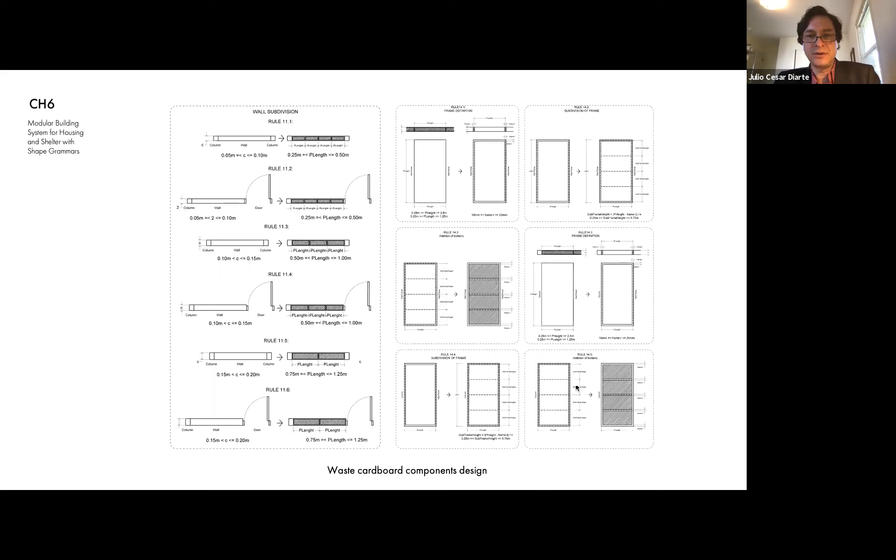Then the wood frames are filled with panels made of waste cardboard tubes, and these are the rules indicating how to place those tubes to create these panels.

Finally, the grammar offers a set of rules to guide the fabrication process of waste cardboard components. The fabrication process in this case is completely done by hand.

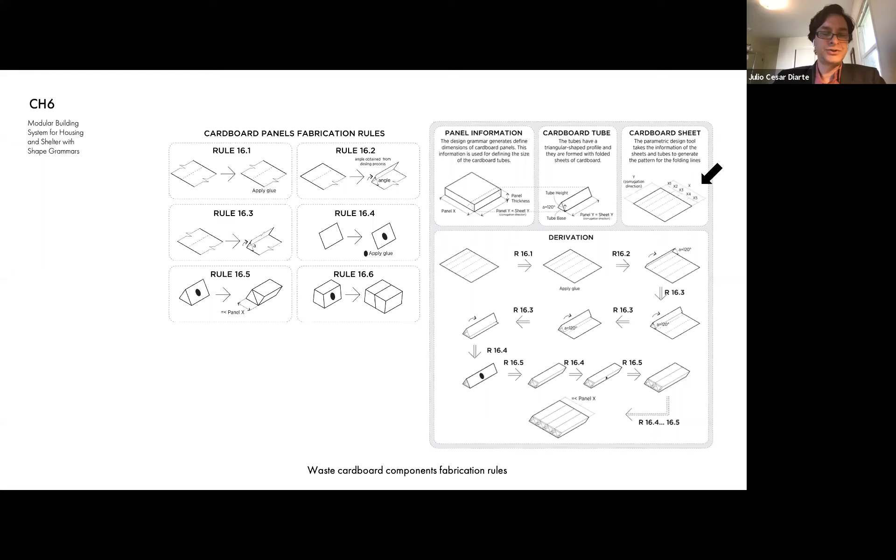This is an example on the right, where the grammar combines the templates generated by the digital tool presented in chapter 4 and the derivation of the rules shown here on the left, to create these cardboard panels, exactly like this one you are seeing here.

The work in this chapter was published at the proceedings of the CAADRIA 2020 conference, held last August.

Now chapter 7 will discuss findings, contributions, and future work. For doing that, I want to bring back the questions I shared with you at the beginning. Is waste cardboard a feasible material for architecture?

I believe yes, we can reuse waste cardboard directly or indirectly to make buildings, because there is an increasing interest in reusing more recyclable materials. It is low cost and available.

It has low recycling rates in low-middle income countries, and the proposed reuse system for housing is applicable in the target context, as shown in the experience of the workshop.

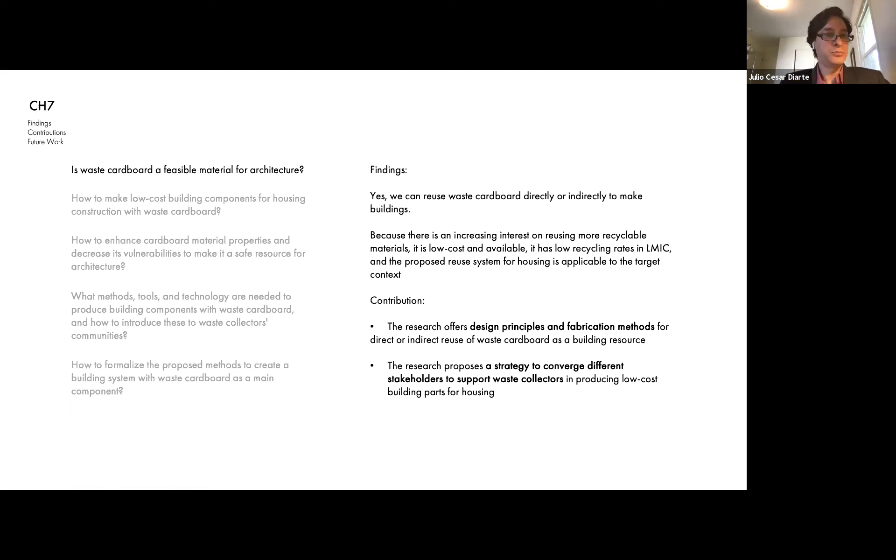The research offers design principles and fabrication methods for direct or indirect use of cardboard as a building resource, and proposes a strategy to converge different stakeholders to support waste collectors in producing low-cost building parts for housing.

How to make low-cost building components with waste cardboard? I think there are two ways of doing this. One is to use waste cardboard to create building elements for direct use in construction, combined with other materials.

The example is the wall, floor, and ceiling panels, and acoustic and thermal panels. Or you can use waste cardboard to support existing building methods. And this is the example of indirect use as concrete formwork.

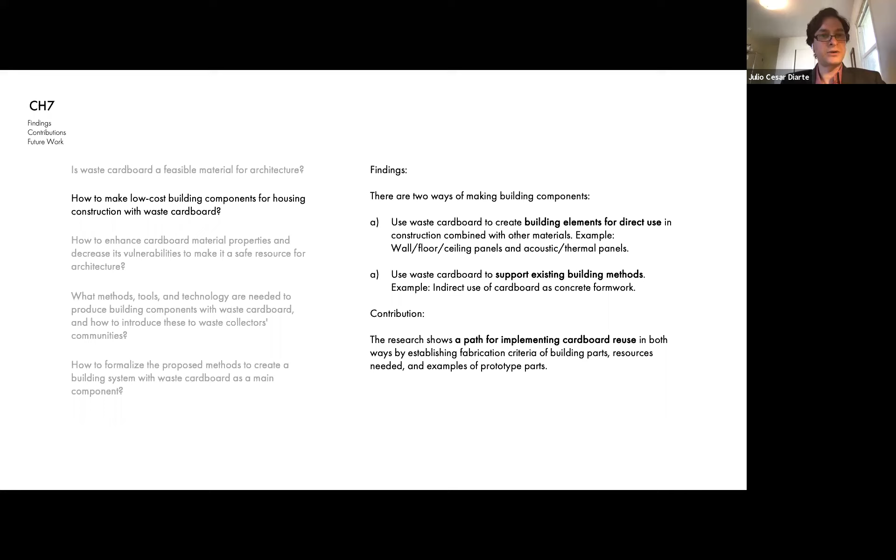The research shows a path for implementing cardboard reuse in both ways, direct or indirect, by establishing fabrication criteria of building parts, resource need, and examples of prototype parts.

About how to enhance cardboard properties and decrease the vulnerabilities of the material, it is important to maximize its use for non-structural applications, partition walls, ceilings, acoustic panels, or combine it with wood or metal, depending on the budget, if used for structural applications.

You can also minimize its contact with moisture and fire by impregnating waste cardboard with cement plaster and/or adding other layers of water-resistant materials such as plywood, cement boards, or galvanized siding panel.

The research develops low-tech strategies to reinforce waste cardboard components and protect them from vulnerabilities.

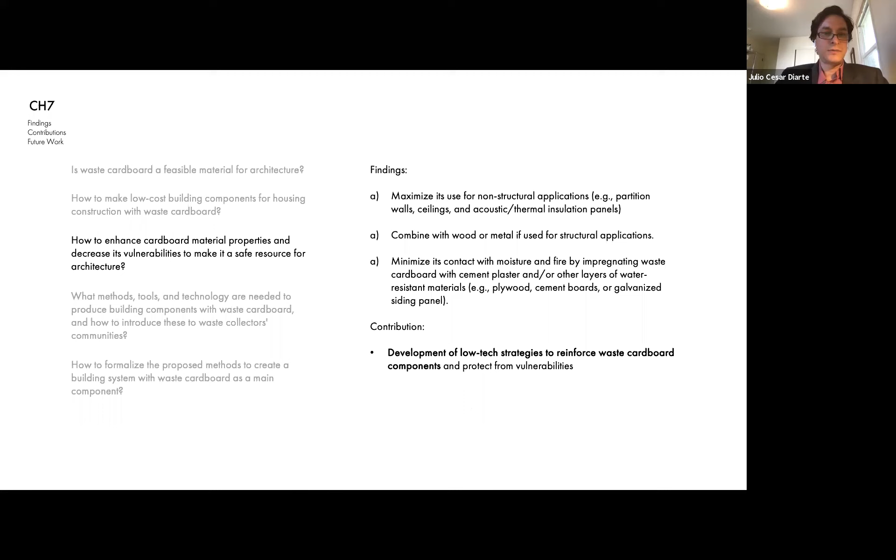Regarding methods, tools, and technology and how to translate these to waste collectors, the findings include that low-tech methods such as molding, cold forming, winding, cutting, etc., are relatively easy to apply by hand to reuse waste cardboard sheets. The digital tools help dealing with variability of sheets to design building components of different shapes.

Waste collectors can learn and apply these fabrication instructions for making the building parts. Co-building workshops are a valid way to translate the system and help validate the use of the material.

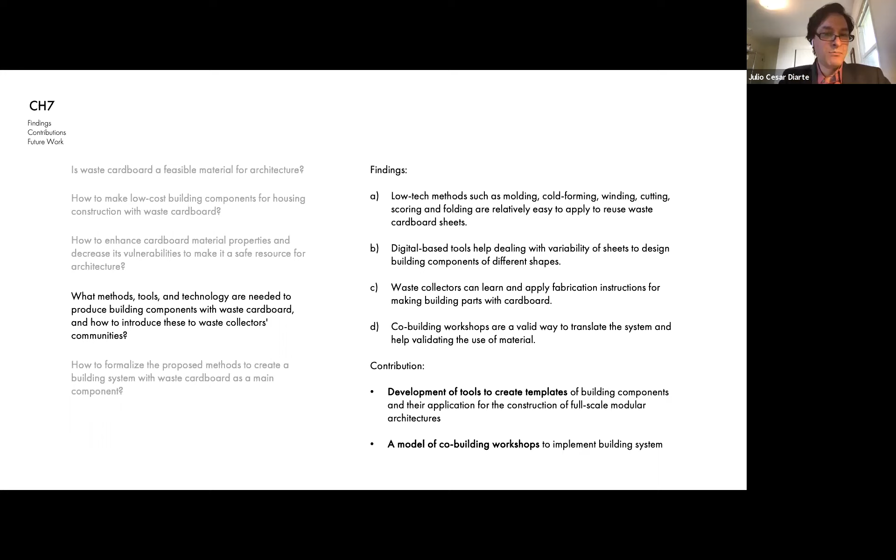The research develops tools to create templates of building components and their application for the construction of full-scale modular architectures, and it offers a model of co-building workshops to implement the building system.

About formalizing the proposed methods, the findings include that waste cardboard components adapt easily to panelized building systems for housing. Shape grammars can help to structure all the procedures for designing a housing system with waste cardboard.

In this case, the contribution is a shape grammar that encodes all the procedures for customizing housing layouts using this material and a system for assembling them. The system includes the procedures, a system for assembling them into housing solutions, and a grammar that includes the first two, which can eventually be used to generate a computer program that implements the grammar.

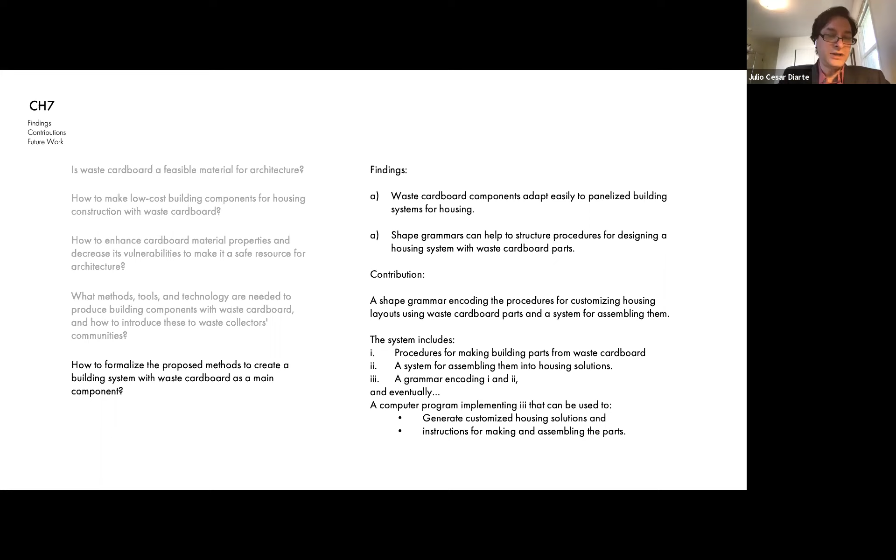Then it can be used to generate customized housing solutions and generate instructions for making and assembling the parts.

Regarding future work, I intend to continue working on practical applications of cardboard systems for modular constructions and social housing. In this regard, I want to mention that the prototype unit number 2 that was built during the workshop in Paraguay will be used at the Center for Research in Paraguay as part of their research facilities.

The fabrication of detached modules for different uses is a future line of research that I want to pursue. I am interested in social housing in low and middle income countries, and I have been in contact with an NGO from Paraguay, Fábrica Social de Viviendas, for a collaboration to implement waste cardboard as acoustic panels in their houses.

Finally, I want to continue researching the indirect use of waste cardboard to make formwork for casting concrete. In this regard, a proposal that Marcus and I put together for the Seoul Biennale 2021 was shortlisted, and I hope we will present the research next year at the Biennale.

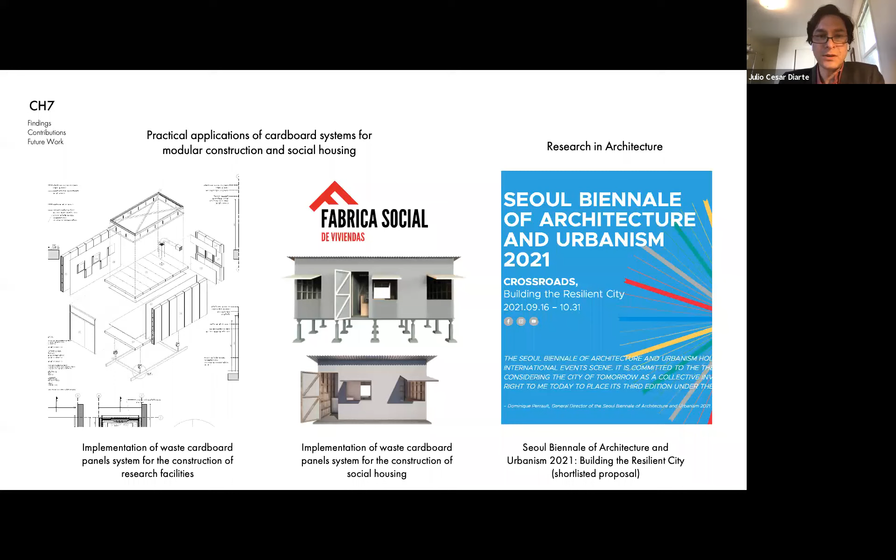To conclude, I have these 5 main points. First, I believe it is possible to reuse waste cardboard into building parts, but it is very important to continue investigating ways of improving the quality of the parts and durability.

For this, the collaboration with structural engineers is very important. It is possible to develop a comprehensive housing system from those parts, but this requires extensive collaboration with stakeholders to validate the use of these materials for housing.

Lay people can follow and apply procedures developed in this research to make building parts out of waste cardboard, but more instruction is needed to enhance their building capabilities and produce, for example, wood frames.

Waste cardboard can support the building capacity of collectors in low and middle income countries in two ways: direct use of low tech and craft based tools, and indirect use of digital based tools.

For doing this, collaboration between university and community is critical, and this can help mediate between low and high technologies for practical applications of the building system and to adapt the system to different contexts.